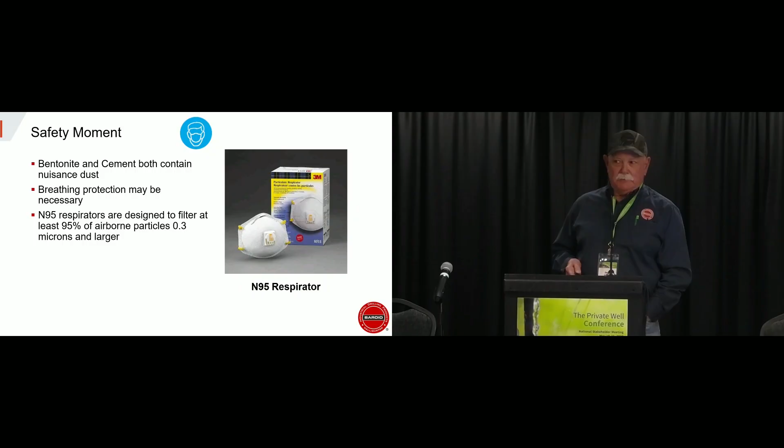With our company, we always start with a safety moment. This has to do with mixing grouts because we create some dust, so it's a good idea to stand upwind from the mixing procedure. There are those N95 respirators we all had to wear for a couple of years, which didn't filter out COVID at all. They'll take it down to 0.3 microns, and a micron is a millionth of a meter, so it's pretty fine.

So why do we seal wells? I got to looking at the presentation by Tom Christofferson, they did a grout study at the University of Nebraska a number of years ago. First of all, it's legal, we comply with local and state regulations and abandonment requirements. Every state's a little bit different, someone mentioned Idaho is different than Montana. For instance, in Idaho, when you're grouting, it's required a 30% solids grout. In most other states, like Oregon and Washington, it's a 20% solids grout. So you've got to know the local regulations.

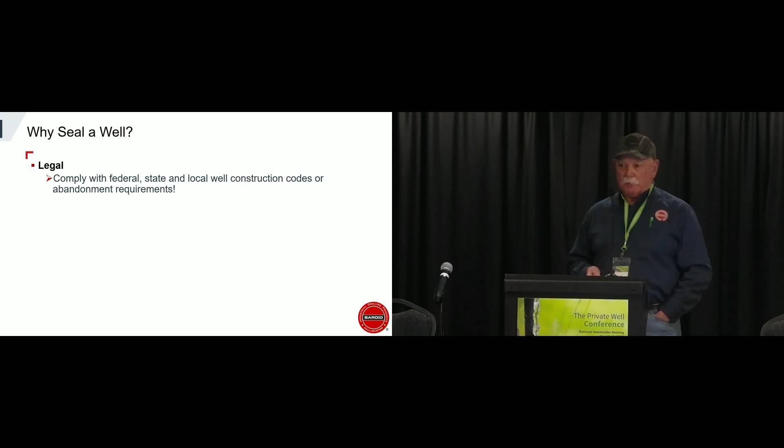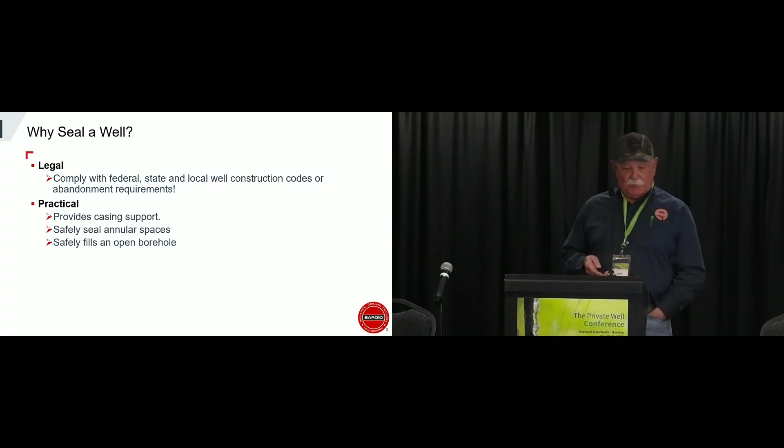On a practical side, it provides casing support, helps to safely seal the annular spaces. We don't want commingling of aquifers, so practically we safely fill an open borehole. We'll get to the methodologies in a bit. For protecting groundwater quality, in the Nebraska study, nitrates were above 10 milligrams per liter, which is the cutoff. They found levels much higher because some wells sealed back in the 50s, instead of using a grout seal like bentonite or cement, just filled the backside with gravel, which provided an avenue for contamination from surface waters or farming activities and nitrates. So we definitely want to keep the aquifers from commingling.

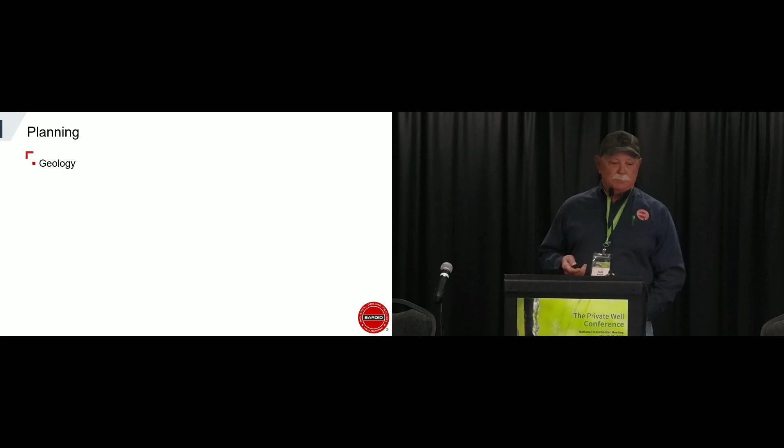What we like to talk about is, we start a good seal with the first turn of the bit, so a little bit of planning, which we'll go over as we go along. Geology is all different, right? We could be drilling in overburden, alluvium, or problematic formations like limestones, or in a lot of western states, volcanics. The vadose zone is a seasonal variation of the water table, which varies depending on precipitation, droughts, and all that kind of stuff.

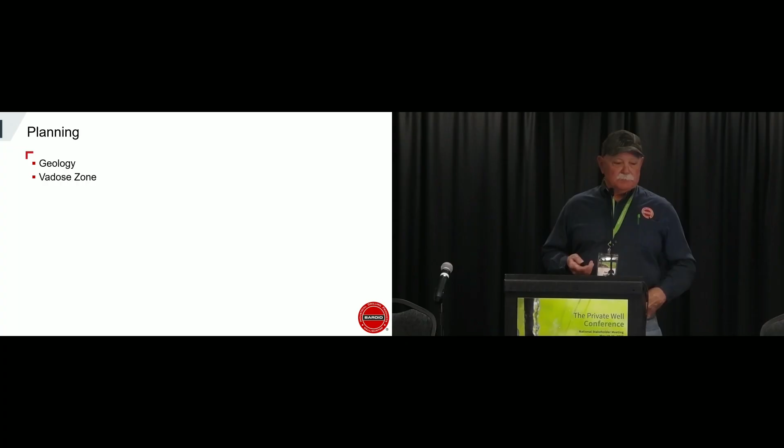Are you going there? Okay. Oh, my gosh. Sorry. Okay, let's go back to where we were.

Okay, with geology, grout choice is influenced by geology. Like I said, we could have limestones, like karst topography, which are dissolution cavities in limestone, so that could affect our grout decisions. One size doesn't fit all. The vadose zone, this unsaturated zone between the piezometric level and the water table, or the ground surface and the water table, is regionally influenced.

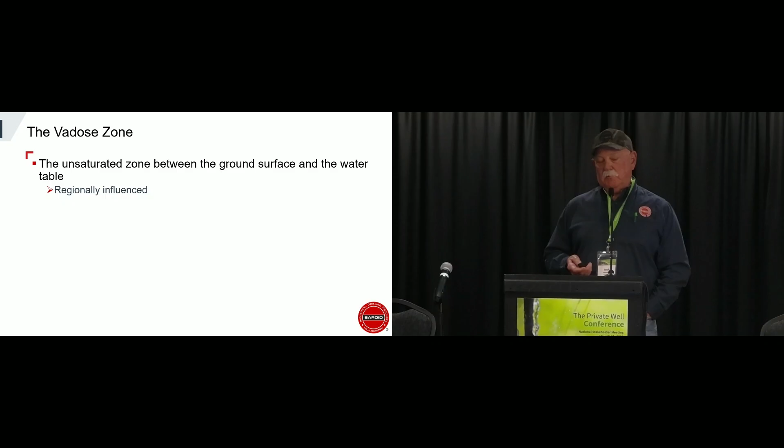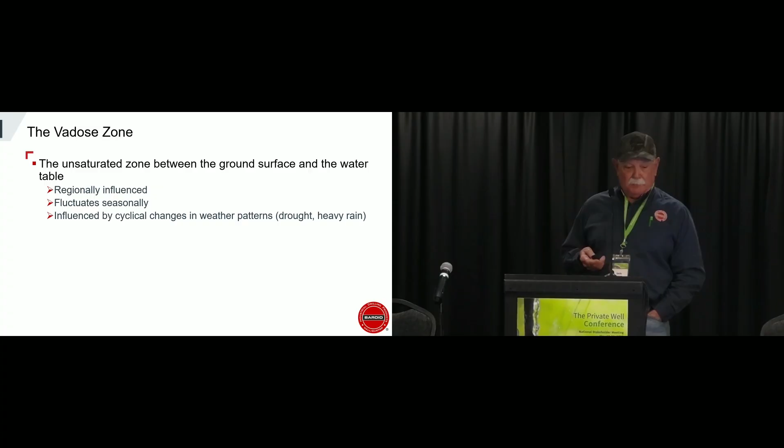Many of you know that we didn't have a lot of snow out west here this year, so we're going to be looking at probably extended vadose zones and drought conditions. It usually fluctuates seasonally, and like I said, this year we're having a drought. Sometimes we'll have so much snowfall we don't know what to do with it.

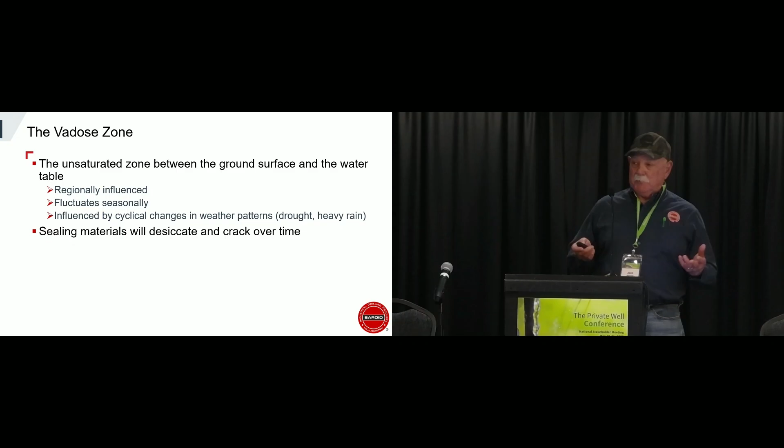Sealing materials can desiccate and crack over time. And I think that's what in the grout study they found, that when pumpable grouts were placed in the vadose zone, well, they just disappeared, so they were able to mitigate that.

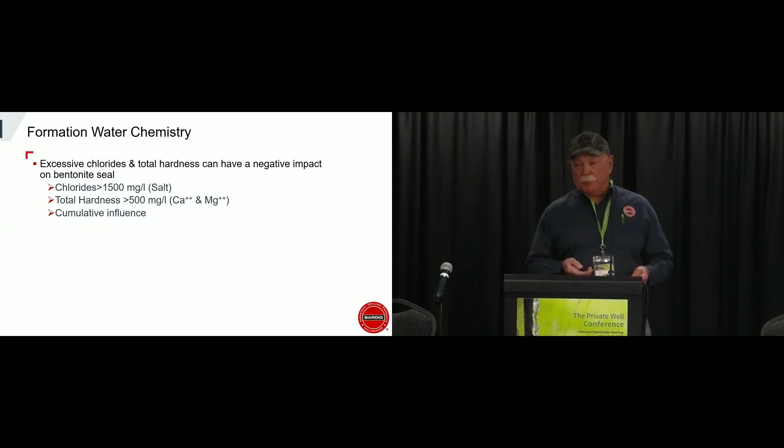Formation water chemistry: excessive chlorides and total hardness can have a negative impact on a bentonite seal. Chlorides in excess of 1,500 ppm, which is basically salt, and total hardness of 500 ppm or milligrams per liter with combined calcium and magnesium. Having both of these is a cumulative effect.

I was working on a job down in Dixie Valley, Nevada, and it definitely wouldn't be good for bentonite. The chlorides were about 25,000 parts per million, and the total hardness was over 2,000. But in that case, we used cement.

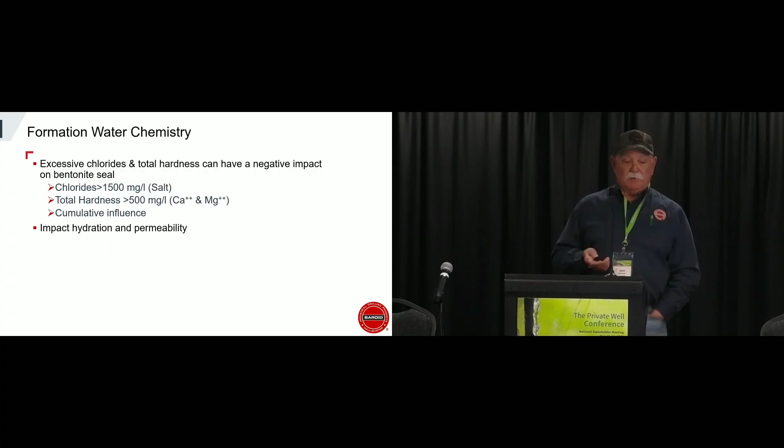If your bentonite's not able to hydrate, it's contaminated. That will have an impact on hydration of the product and also the permeability, which won't give a good seal. So for well construction, we have cased well, we have screens, we have slots, louvered, and also open hole construction.

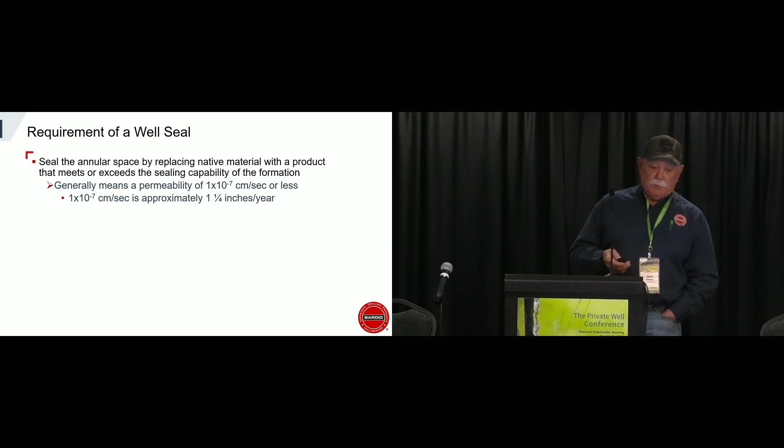So basically the requirement of the seal is to seal the annular space between the casing and the borehole by replacing the native material with a product that meets or exceeds the sealing capacity of the formation. This generally means a permeability of 1.0 times 10 to the minus 7 centimeters per second, or approximately 1.25 inches per year. Pretty low.

So different types of sealing materials that we use: calcium bentonite. There's a lot of bentonite around the world. It has a dominant calcium exchangeable ion. It's not a very good sealant. Normally these things are used for skincare products and different things like that.

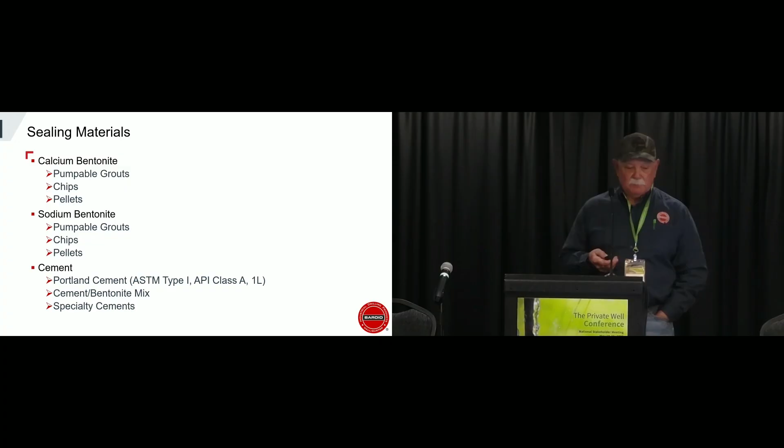Sodium bentonite, definitely the best bentonite for sealing, in the form of pumpable grouts, chips, and pellets. And then, of course, there's our old friend cement: Portland cement, kind of a blend of cement and bentonite, which is pretty common, and also specialty cements.

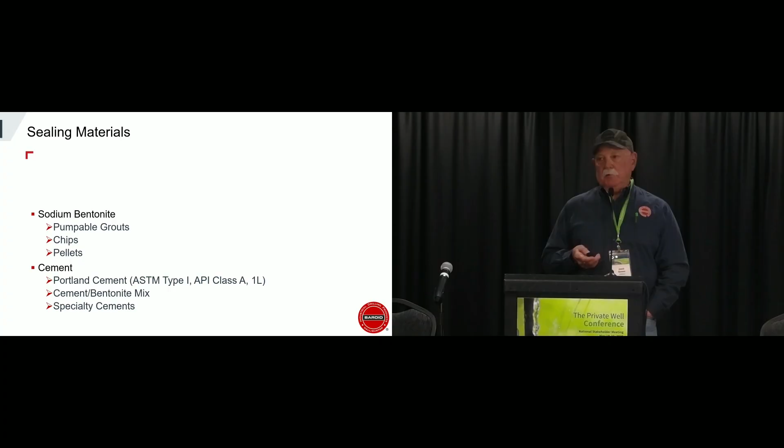With calcium bentonite, we don't normally use it for sealing, so we're going to take that out of the equation. A lot of bentonite clays from around the world don't have the sealing capacity that sodium bentonite does. So what do they do? They enhance it, either with polymers or with soda ash to try to make it a better bentonite. But it's best with bentonite that's generally mined in Wyoming and Montana.

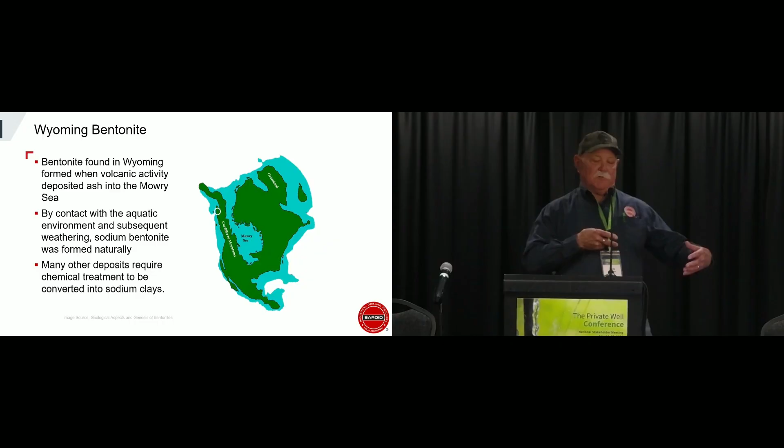I'll tell you why we got lucky with the bentonite out here in Montana and Wyoming. It was basically a pulse. Anybody know about the Yellowstone hotspot? It's basically a mantle plume, and the continental United States is sliding to the southwest. We started with volcanism basically from maybe Tillamook, Oregon, Smith Rock, McDermitt, Nevada, all the way up to Burley, Idaho.

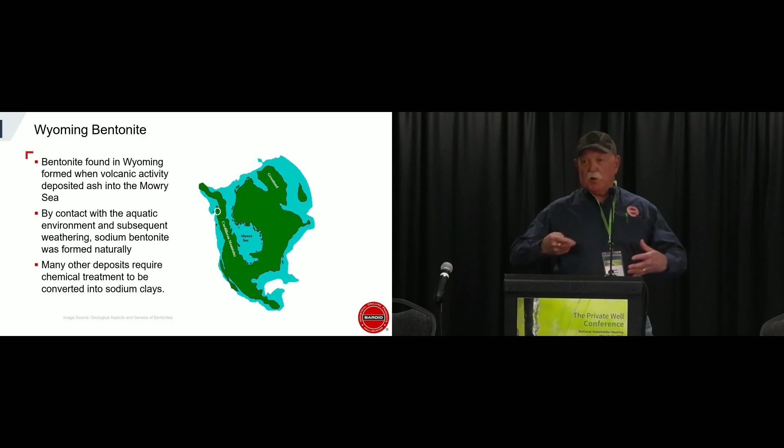So these pulses of volcanic ash were put into an inland sea, probably Gondwana land, or when the continents were all kind of stuck together. But we got the pulse, and there's no other bentonite in the world like it. As this volcanic ash fell into this aquatic environment, subsequent weathering and metamorphing of the clays turned them into a natural high sodium bentonite.

Like I said, some of the other clays found around the world have to be beneficiated with some sort of material, either with a polymer or something like soda ash.

So why use bentonite for a seal? It has the ability to hydrate and expand. I used to be able to take like a 16-ounce cup of Hole Plug, what we would call bentonite chips, and add the same amount of water and seal that up in a 1 quart Ziploc freezer bag. As the bentonite hydrated, it expanded, and it would actually break the seal on that 1 quart bag. That's kind of what we're looking for: it's expansion pressure, and it's also confining pressure.

So we want a low permeability material, less than 1.0 times 10 to the minus 7 centimeters per second, and increased slurry volume over possibly using cement, for instance.

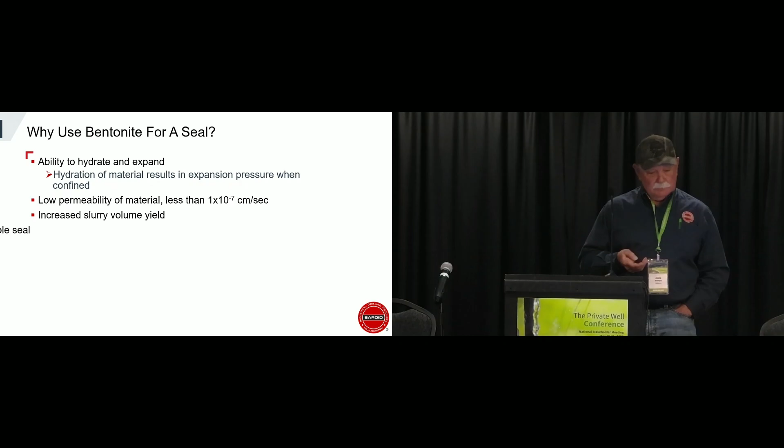It produces a flexible seal. Anybody who's ever seen bentonite, it's just like hard modeling clay. And there's no heat of hydration.

I'll explain that. Basically, when you're using cement, as it cures, it's an exothermic reaction, so it gives off heat. That heat can sometimes be excessive enough to deform plastic pipe, and also with steel pipe, because as the exothermic reaction goes, it gives off heat. So with steel pipe, it actually expands the steel a little bit, and as the cement cures, the steel contracts. So there you have a micro annulus, and your seal isn't what you need it to be.

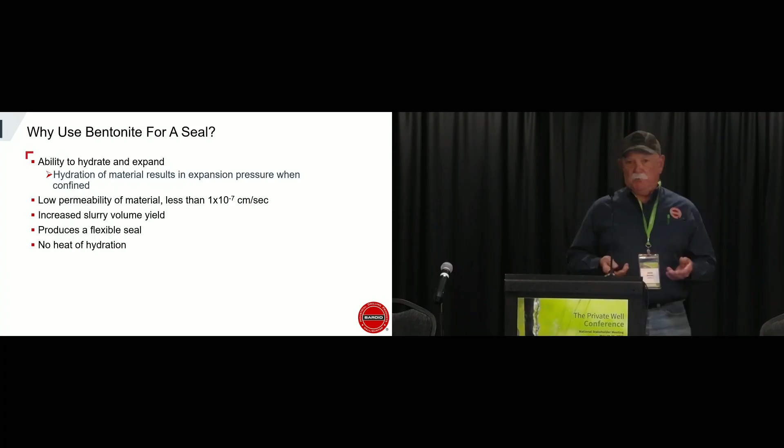So high quality bentonite produces higher quality seals. Sodium bentonite is superior to calcium bentonite.

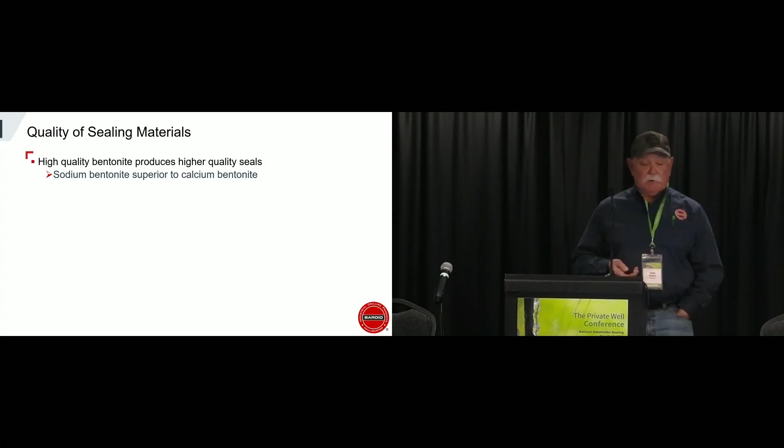So the definition of high quality bentonite: it's a high percentage of sodium montmorillonite. Montmorillonite is basically a smectitic clay that actually expands, so it results in higher liquid limits, meaning it can take on more water to expand the structure, providing higher expansion pressure. That's determined by analysis of untreated bentonite, XRD or XRF. So it has a high shear strength and a high degree of confidence in the seal.

This is just a little diagram of the different types of sealing materials. We start off with bentonite, then we'll go to pumpable grouts. Pumpable grouts are convenient because you can actually place them down the annular space of the borehole without having to worry about bridging and leaving gaps in the seal itself.

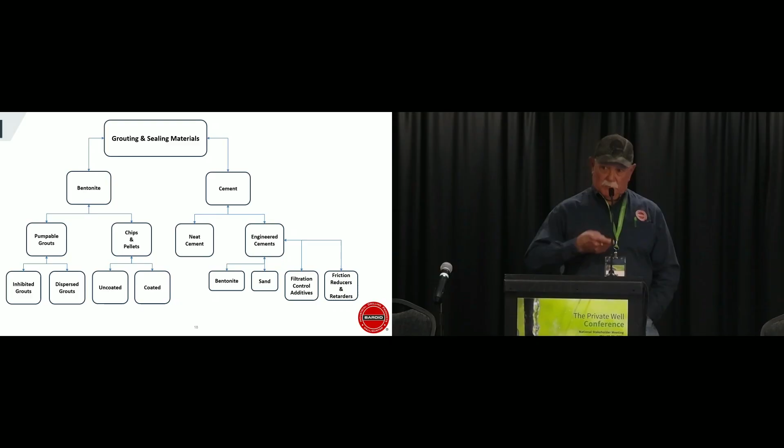And of course, there's chips and pellets. The bentonite chips are probably the best seal available out there, but there are issues with actually getting 3/8 inch material down, let's say a couple hundred feet, without bridging off. Some states require that you tremie it down from the top of the gravel pack where your aquifer or producing zone is, all the way to the surface.

Other states require that you sieve it out, because all bentonite is just clay and it gets moved around in the bag, so you're going to have a dust issue. Some states require you to remove that dust by running it across an expanded metal screen or something like that, because what bentonite clay dust will do is viscosify the water that's in the well, which impedes the downward travel of the bentonite particles to depth, so you don't bridge off.

So we have inhibited grouts, dispersed grouts, and pellets. Maybe some of you have seen pellets. There's a company called PDSCO, I believe, that takes 30 mesh material and squeezes it together at 3,500 PSI, and the inherent moisture content in the clay creates a nice pretty pellet. Many engineering firms require them because they're kind of pretty and they seem to pack really well. But if you consider it's a 30 mesh material versus a 3/8 inch solid piece of clay, the seal probably isn't going to be as good as a chip bentonite.

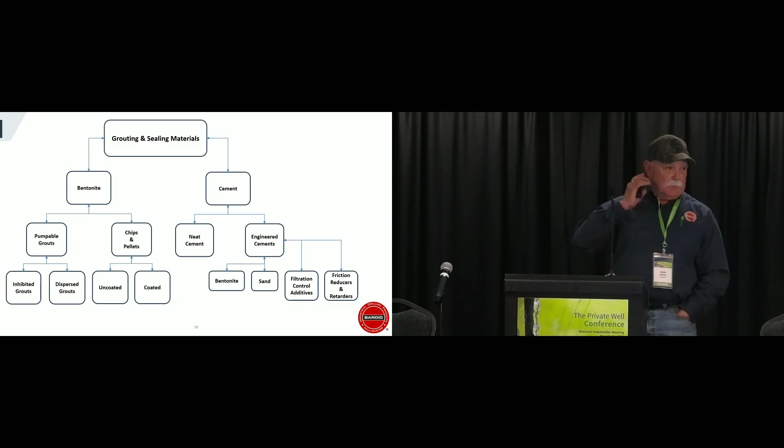And then we'll look at cement. There are different types of cement: neat Portland cement, and engineered cements. With engineered cements, because of different concerns like heat of hydration and other factors, a lot of engineering and hydrology firms will have you add bentonite to the cement.

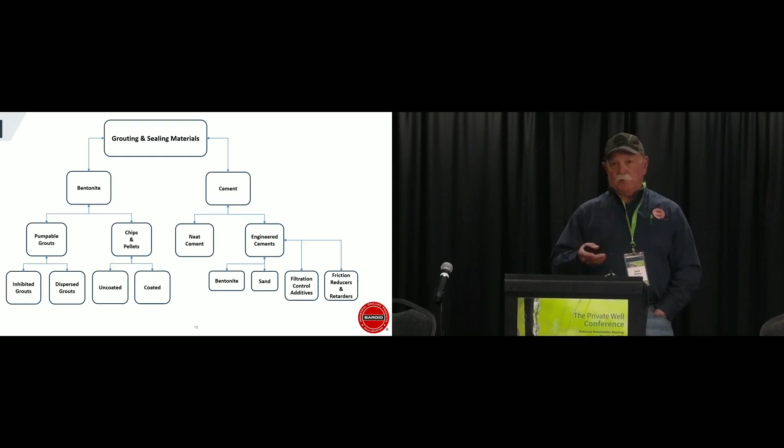Bentonite does benefit the cement. It actually has a higher water requirement, so in other words it lightens the cement a little bit and it also pumps a little better. But because it has an additional water requirement, it has a slower set time, and the heat of hydration is not as high. And then, of course, when you mix cement the way Halliburton likes you to mix it, a concentration of 5.2 gallons of water per 94-pound sack of cement, which is a cubic foot, the cement can get a little thick.

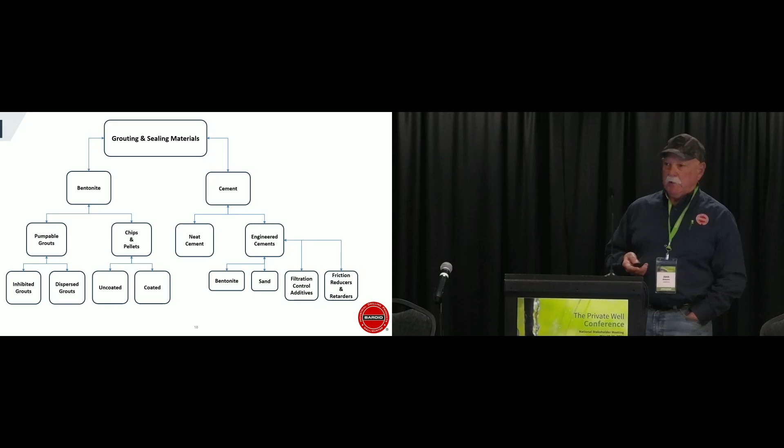Cement can get a little thick, and if you don't have the proper equipment on the rig, it's going to take too much time to pump the cement.

It could go off down the hole, and it has other problems. But I mean, we can address all those.

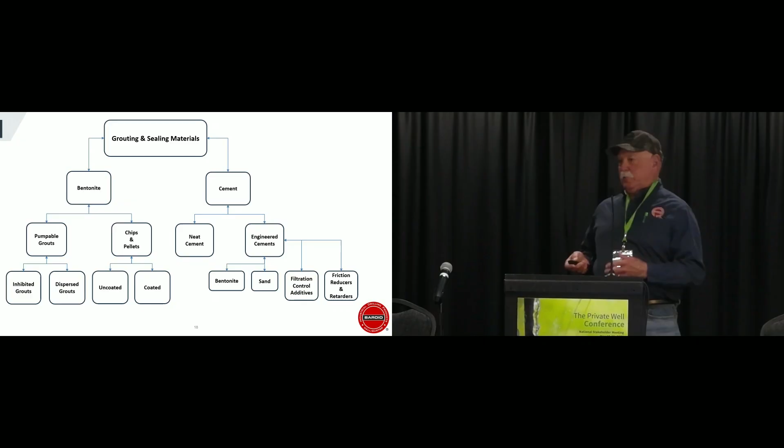Chip bentonite, utilized in well completion abandonment, gives the best possible seal, highest percentage of solids, and the maximum structural integrity.

Here again, you have to be able to get that bentonite down between your casing and the borehole, so it takes a while, and it takes a little bit of methodology to actually get it right.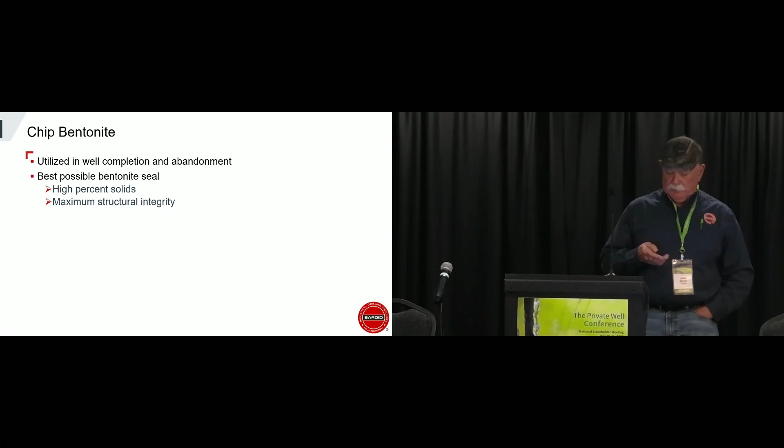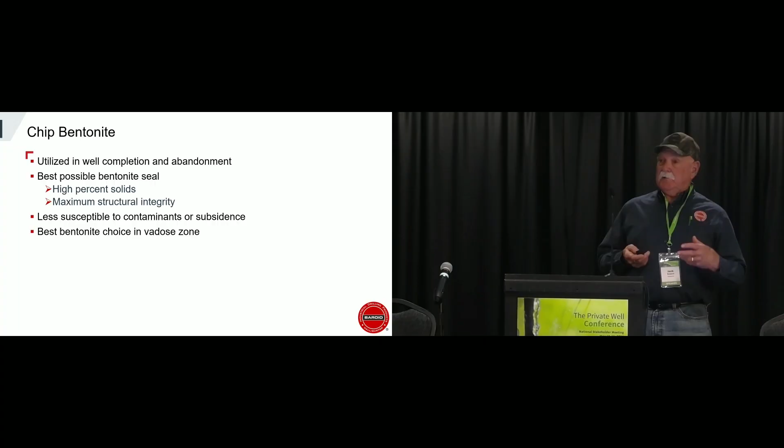It's less susceptible to contaminants and subsidence, and it's the best bentonite choice in the vadose zone, as determined by the Nebraska grout study.

It was unconditionally the best. It requires adequate annular space and proper installation methods.

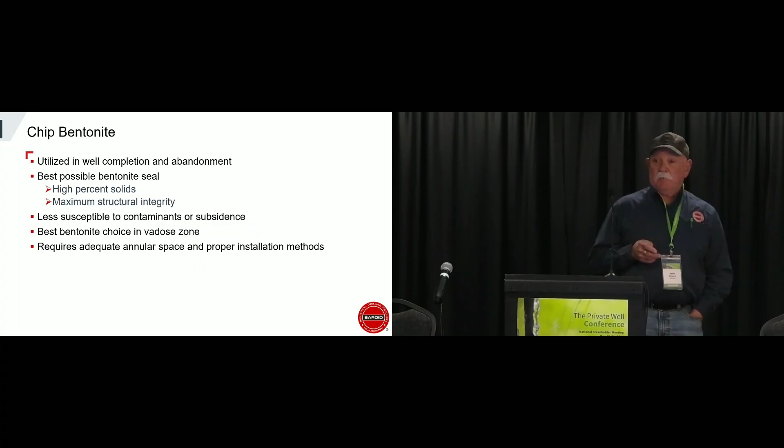So in general, we like to say 2 to 3 minutes a sack. But I've done that - I've been in core holes in Nevada, and we put the timer on, and we try to mix 3 minutes per sack, and you had to put like 50 sacks down the hole. Well, it wasn't pretty. So, well, we cheated a little bit.

And it's recommended above the filter pack, where your shale trap is, to put a certain thickness of bentonite on top of that before you start. You may possibly be using either cement or pumpable grouts.

And there again, 1.5 times 10 to the minus 9 permeability.

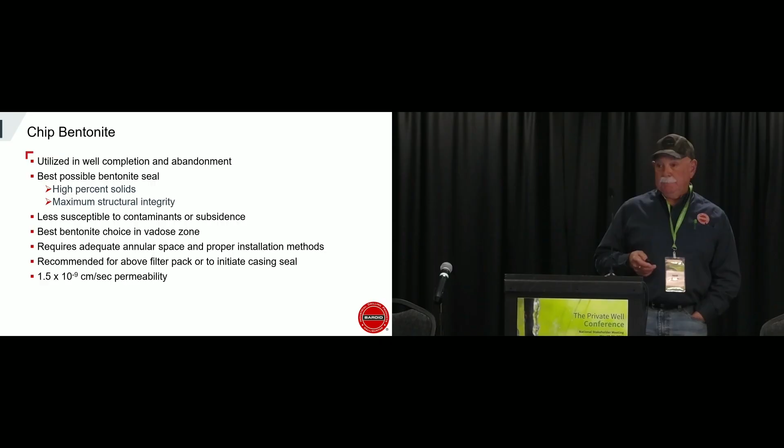So here's a couple of pictures of a device where you could actually put the chip bentonite across that expanded metal screen, and if there's any dust in the sack, that's removed before it starts traveling down. Like I said, bentonite is a viscosifier, so if you viscosify the water that's in your annular space, it

will slow the migration of the bentonite down to the bottom of the hole, which could cause bridging, which could cause not a very good seal.

And I've seen quite a few of these different types of devices, anything made out of sewer pipe or whatever, but just to get the dust out, and then if you can kind of figure out 2 to 3 minutes per sack to put that down the hole.

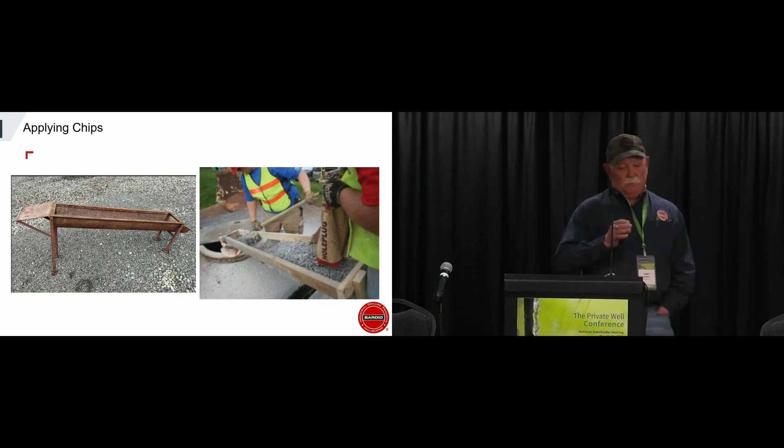And there's another thing - you should know what the approximate amount of volume you have in the hole.

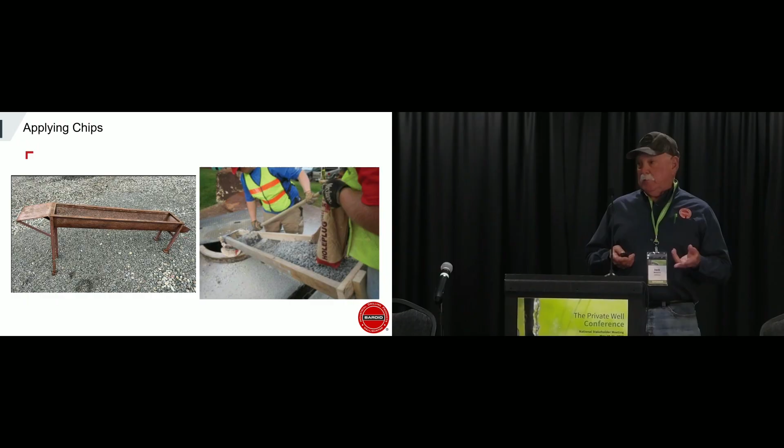And so we know that 1 sack of granular bentonite, the 3/8 size, is roughly 0.7 cubic feet. So if you know your approximate amount of material that you need and you use half of it, I'd say you've got a problem somewhere. So it's likely a bridge.

Bentonite pellets, like I said, are 30 mesh material squeezed together, probably at 3,500 PSI, and they come in different sizes - I think quarter, 3/8, and maybe half-inch.

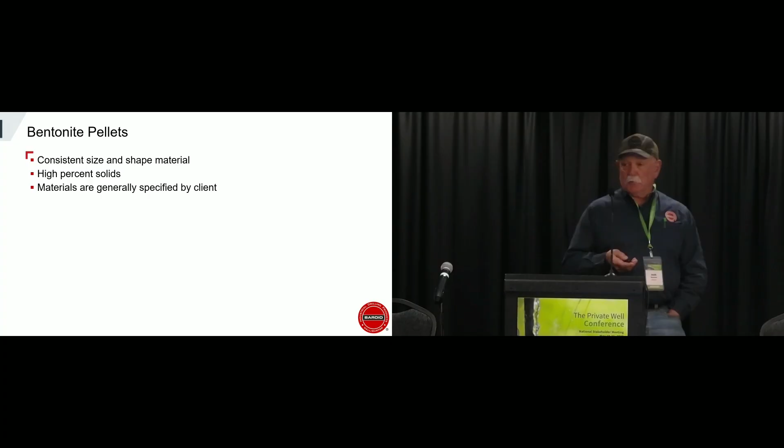A high percentage of solids, and they're usually specified by the client. Now they're kind of expensive, and so if the client's willing to pay for them, I guess that's what's important. But they don't have the structural integrity that chips have, because when they hydrate, now you have 30 mesh material rather than a massive chunk of clay.

So there's two different kinds. There's untreated compressed bentonite, which will probably go off a little faster, and they're probably a lot less money than the coated pellets, and they're quite a bit more than chips. And can be problematic in emplacement, because especially with uncoated pellets, once the water starts hydrating

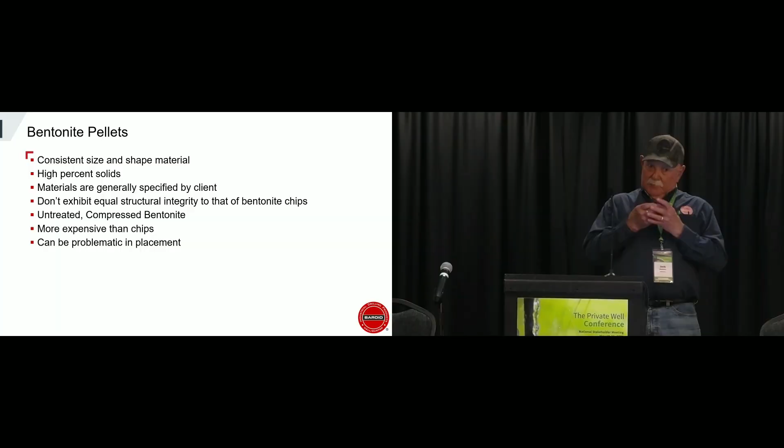them, the likelihood of them bridging off the annular space is there. I don't know what time period that would be, but

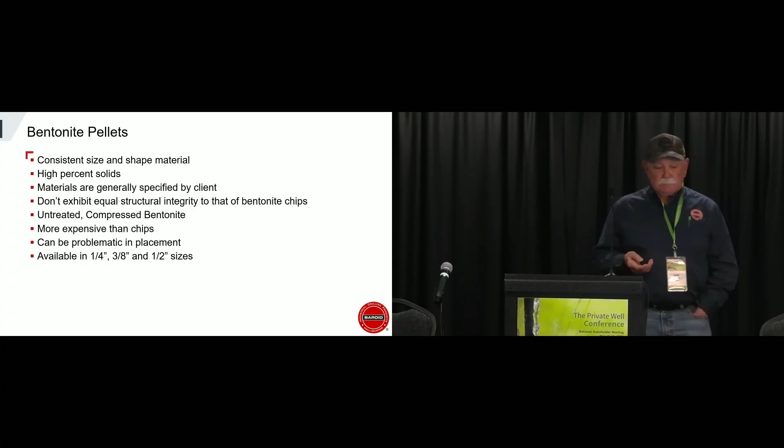so like I mentioned, quarter, 3/8, and half-inch size pellets, and a lot of hydrologists and engineers that engineer a well will specify that you use these pellets.

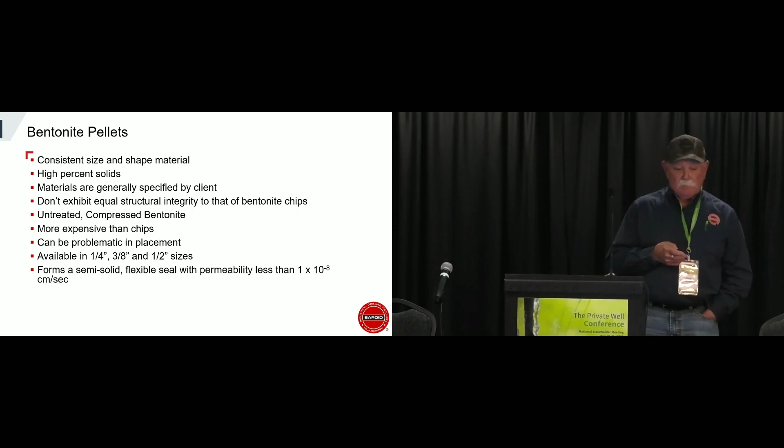And so it forms a semi-solid flexible seal, and the permeability is 1.0 times 10 to the minus 8 centimeters per second.

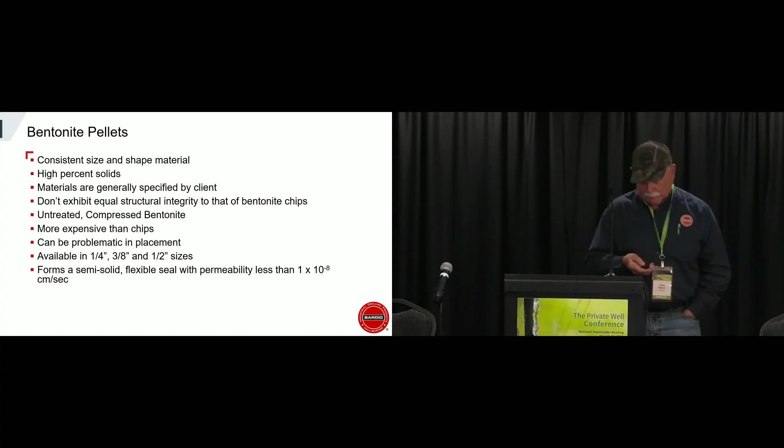And like I said, coated and non-coated. Sorry, I'm getting ahead of myself. So inhibited grouts utilize inhibitive polymers to achieve working time to mix and place grout. Like I said, in the vadose zone, not good - so we have to keep that in mind when we're using pumpable grouts.

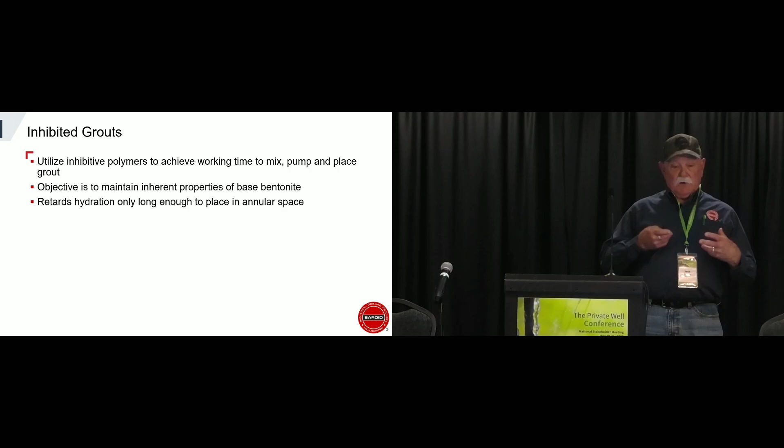So the objective is to maintain inherent properties of the base bentonite. We want to retard the hydration long enough to get them placed in the annular space. And when you pump grouts, you need to have the proper equipment.

I've seen a lot of things, but you have to have a grouter. Grouters are expensive, but if you're in the business of placing grouts, it's a good investment to buy one, because you run into problems by not having a really good seal.

They're less susceptible to subsidence and loss to formation because they are a size chip, probably anywhere from 30 mesh to 1/8 inch. Definitely not the best for the vadose zone. Like I said, we have to have proper equipment, grouters, and mixers. Usually they're one and the same.

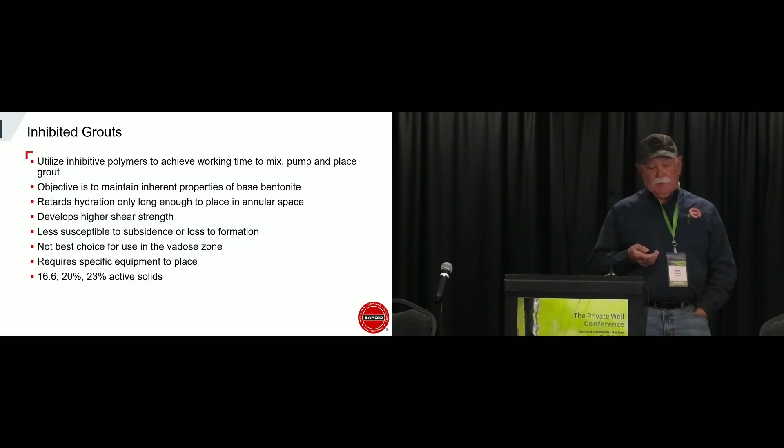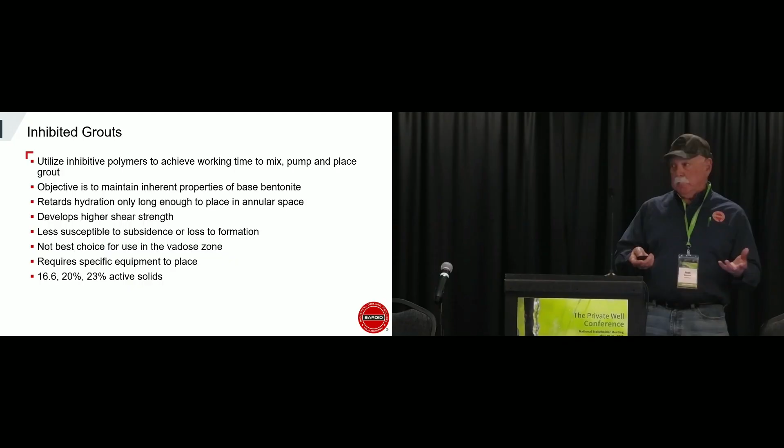So here we have probably 17, 20, 23% active solids. We talked about active solids, that's active bentonite solids. We could look at different types of solids. If you put a whole bunch of sand in some sort of fluid, that's a solid, right? So we want bentonite solids. And permeability here is 1.0 times 10 to the minus 8.

Now we get into dispersed grouts. I'm looking here, sorry. Pardon me for a minute. Timer went to sleep on me, so.

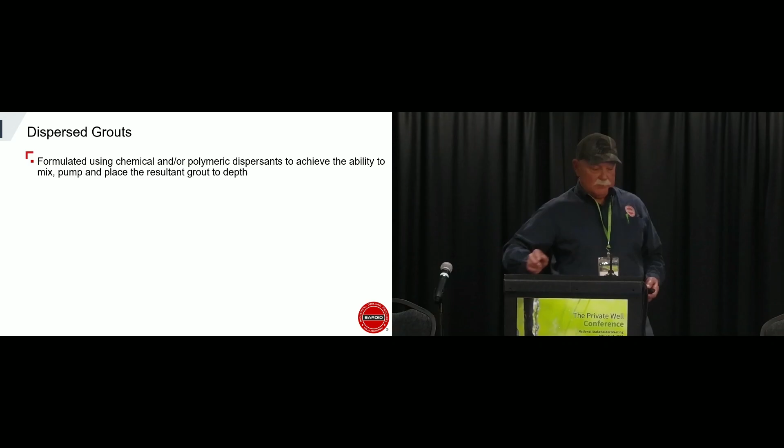Dispersed grouts are formulated using chemical or polymeric dispersants to achieve the ability to mix, pump, and place the grout. The category of pumpable grouts has gained popularity due to demand in monitoring wells. Monitoring wells are definitely smaller, with a smaller annular space, so liquid pumpable grouts are probably preferred.

Some water samples taken from monitor wells test for presence of hydrocarbons. Carrier oils that we normally use to inhibit the grout start out with a carrier fluid that started life out as an acrylic acid, which is a hydrocarbon. So if you're testing for these in monitor wells, probably not that type of grout that you want to use.

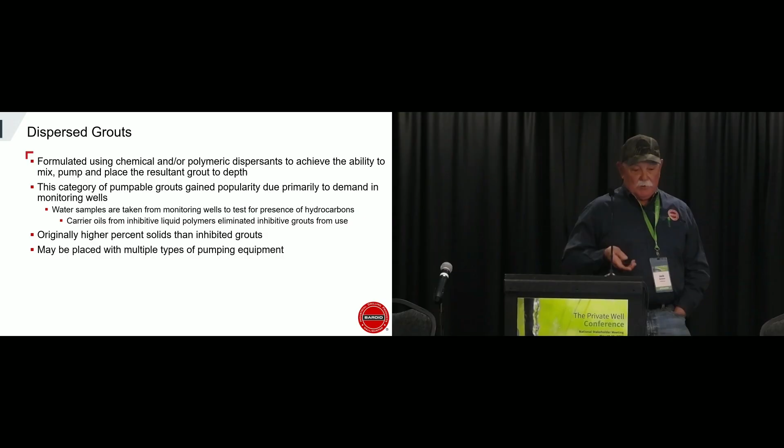Originally, a higher percentage of solids than inhibited grouts. We can place it with multiple types of equipment. They have low shear strength.

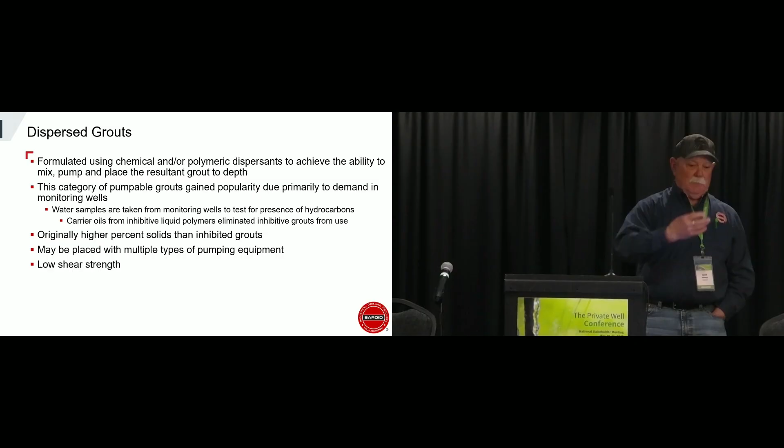Type of equipment I'm talking about is like Wilden pumps, an air pump, a Moyno pump, a positive displacement pump. They have low shear strength, and they're more susceptible to subsidence and loss to the formation. Definitely not to be used in the vadose zone.

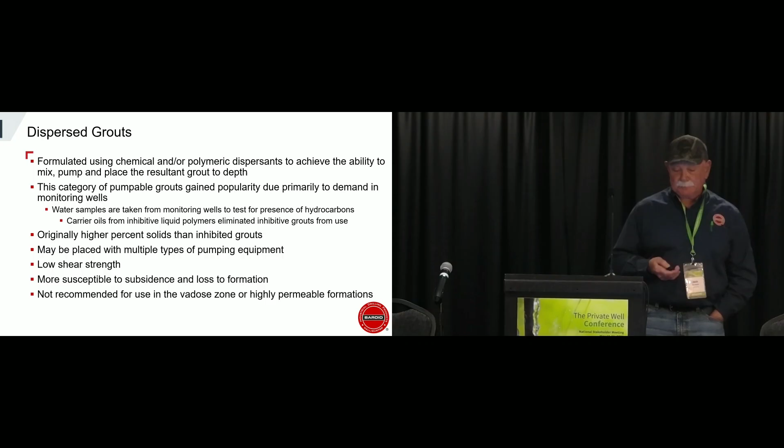So most 20 to 30% pumpable grouts are referred to as dispersible grouts. In place, like I said, multiple types of pumping equipment.

And totally inorganic additives. Now this is a little sidebar here. A lot of states, everybody wants biodegradable, right, in your products, whether it's drilling products or drilling additives. Biodegradable is not good in the water well industry. Just kind of going off the ranch here.

If you use some sort of organic fiber, whether it's cedar fiber or paper, or multiple types of lost circulation material, and there's a lot of natural polymers like guar gums and starches and different things, what that does is provide a food source for bacteria in the water in the aquifer.

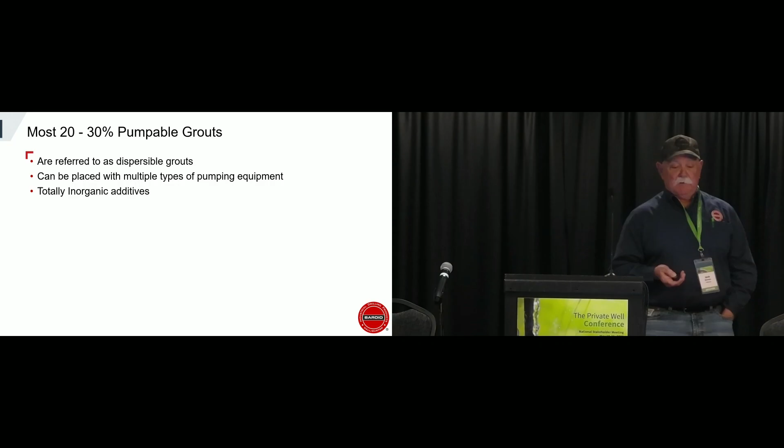But not all bacteria is bad. Some bacteria is pretty good. But they all like it, and they get happy, and they multiply, and all of a sudden now you'll have a bacterial plume in your aquifer. So that's why everything's inorganic, because of the bacterial nutrient that we provide to the bacteria in the groundwater.

Low shear strength and susceptible to subsidence and loss to the formation because they are liquid, and if you have some sort of a fracture, or a fault, or whatever, you'll probably lose that. I don't know why they disappeared in Nebraska, but they did.

So, what's that? One more minute. Oh my gosh, I got a lot of material. So anyway, don't use these in the vadose zone.

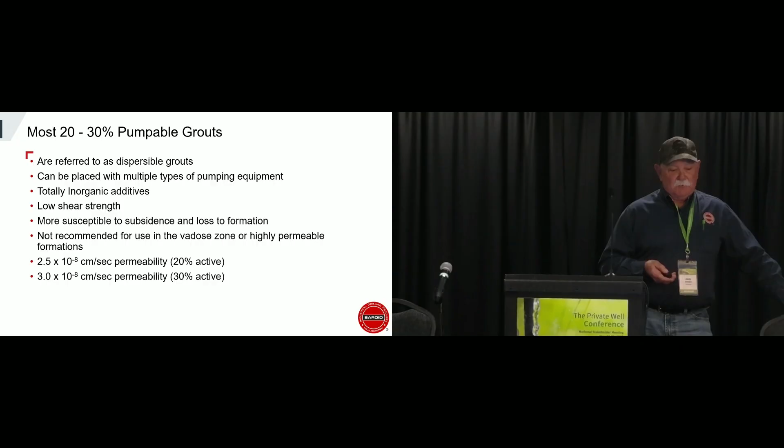We'll get on to cement here in a minute. 20% and the 30% respectively, 2.5 times 10 to the minus 8, and 3.0. Okay.

Pumpable grouts, proper applications: stable borehole environments, saturated zones, no vadose zone. Improper applications: unstable borehole environments. You don't want to have bridging going on. Not in the vadose. Highly unconsolidated fractured formations, bridging again. Artesian environments, you don't have enough hydrostatic head to keep that contained.

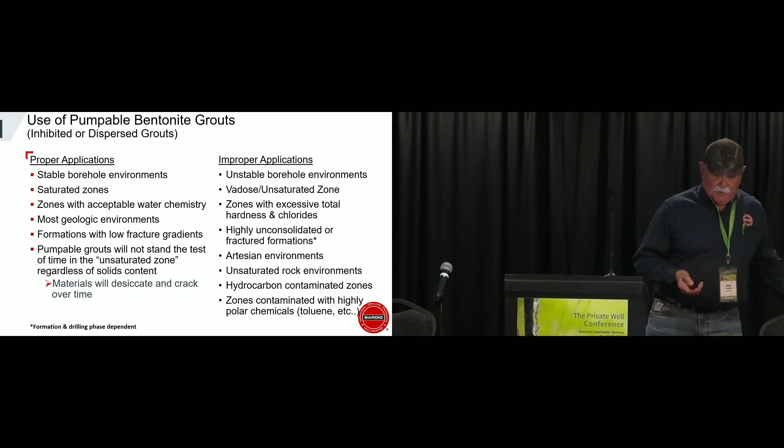Hydrocarbon contaminated zones, zones with other contaminants, and different types of bentonite: chips, pellets, coated, dispersed.

I don't want to rush through cement, but I want to talk about it. It has high compressive strength and resistance to contaminants.

I live on the West Coast, in Washington, but anywhere you might have an evaporative basin where you're going to have high chlorides or high hardness, cement might be a pretty good alternative to using bentonite grouts. Those two contaminants are contaminants for bentonite.

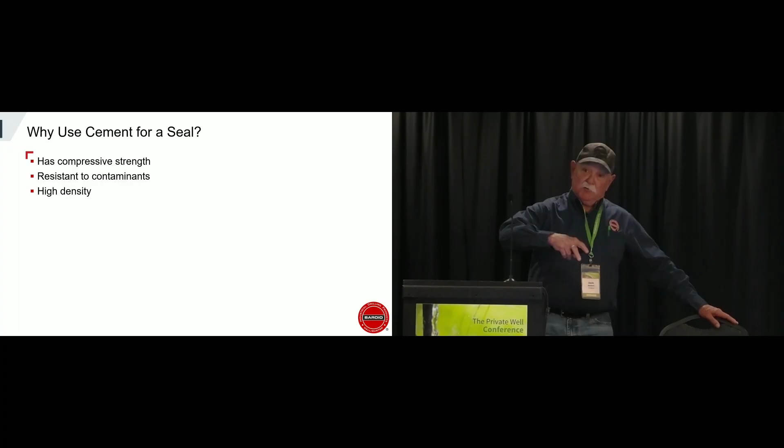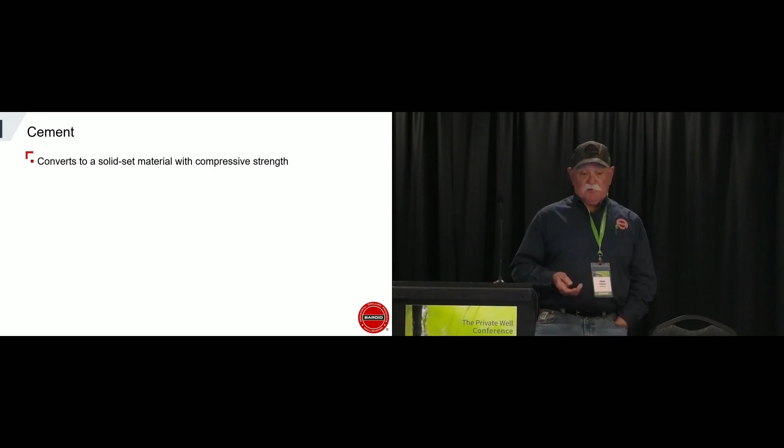They won't allow them to swell. It has a confining pressure, and they're high density, so if you have artesian kind of conditions, a lot of people used to say cement's number one. It becomes a strong material, 12 pounds per gallon up to 16 or 15 and a half.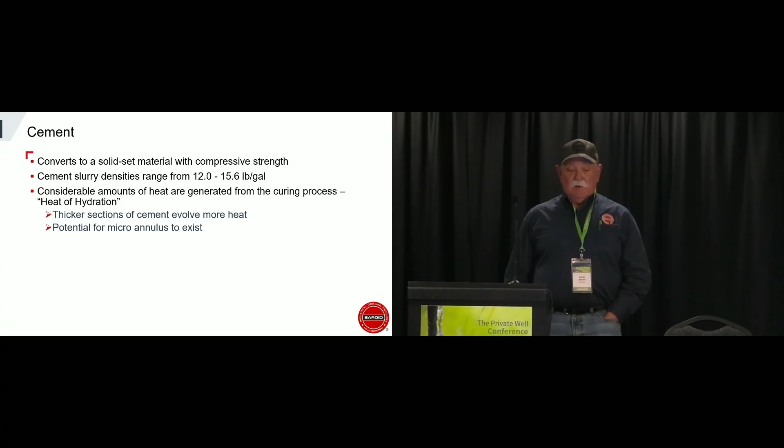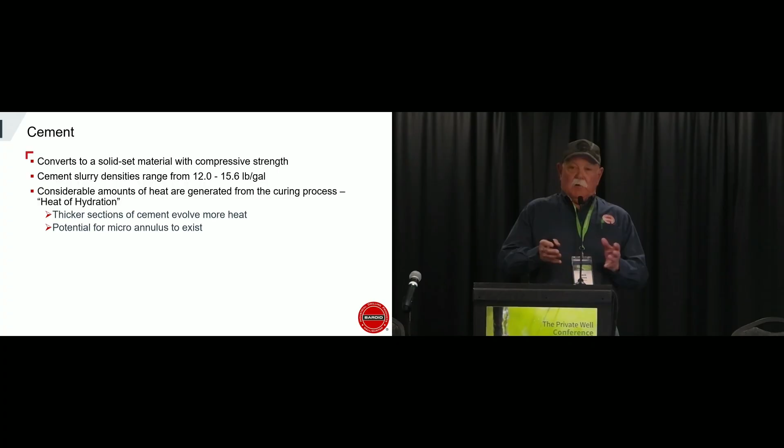The thing about cement, heat of hydration, it can collapse PVC. You create a microannulus in steel pipe to where it expands it. When it cools, it contracts, and now you have a microannulus.

Filtration control, in other words, you have a hydrostatic head on the cement. It tends to push the water out. Cement has a requirement for water, but there's additives to counteract that as well.

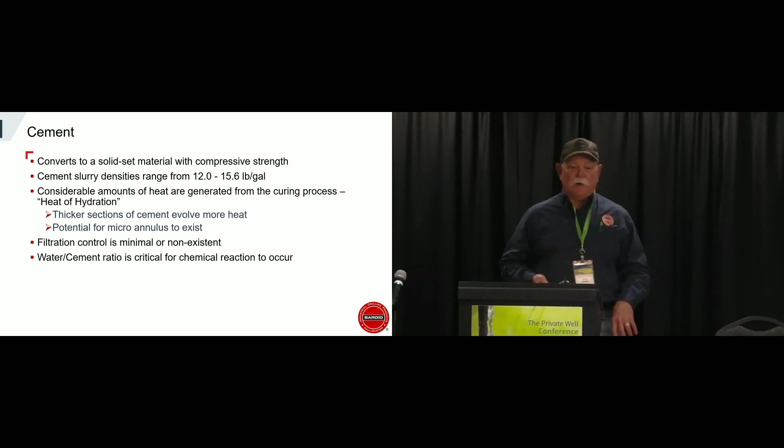Do we have 30 more seconds? Okay, yeah, I think we took a few minutes from you. Okay, in the beginning, so.

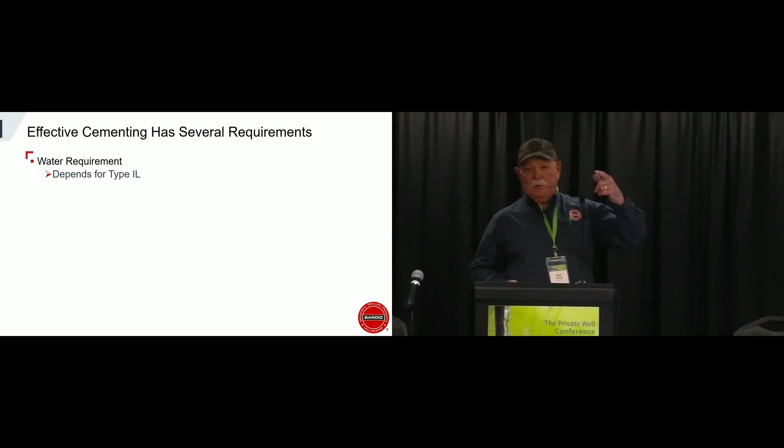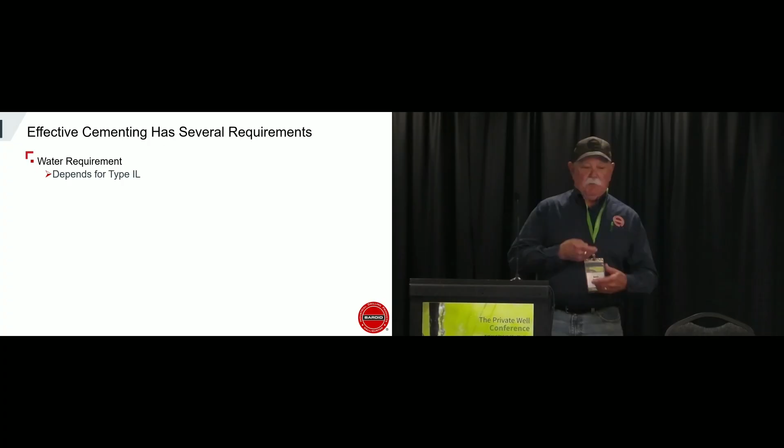Cementing water requirements. Quickly, the cement industry came out with a different type of cement other than Portland. They called it IL. With IL, basically, when you create the clinker, it has to go through a furnace, and so it creates these cement minerals. What they decided to do, because I call it green cement, you don't run it through the furnace as long, so you don't use as much fuel. So they reduce the time exposed in the furnace, and the manufacturer will add either 5 up to 15% calcium carbonate dust.

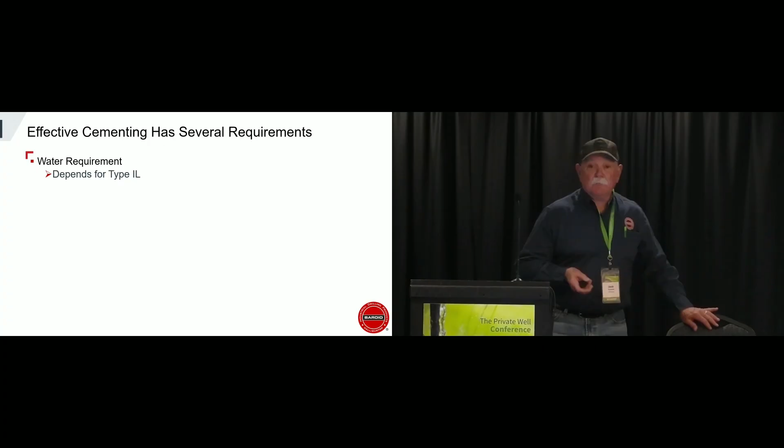No manufacturer has the same mixture. Some of the cements we were seeing, these IL cements, were going off, like when we're cementing downhole, cementing some mining equipment, mining wedges, other types of stuff. It would go off on us. What we wanted was predictability, so we were having a problem with that.

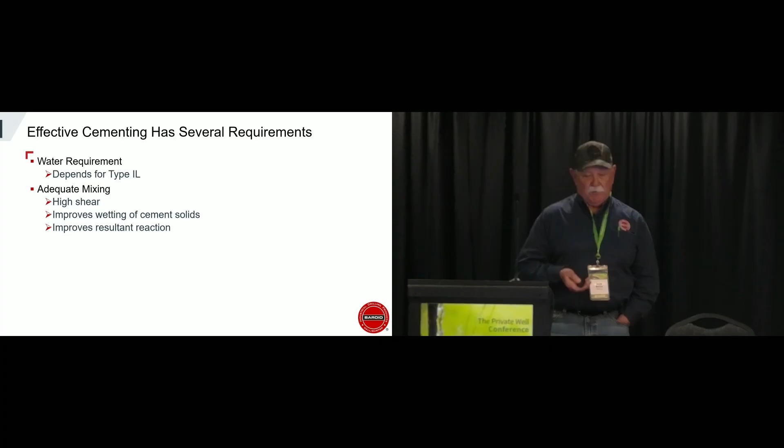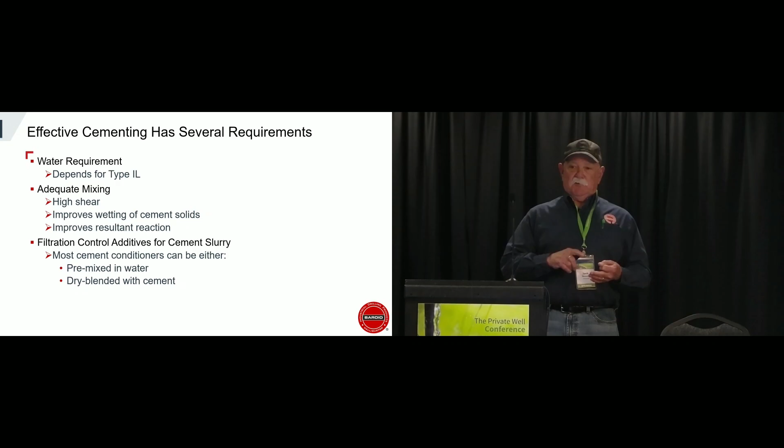So we rectified that with just a little bit more water requirement than we would use with Portland type 1, type 2 cement. Filtration control additives, you can add to the cement, doesn't change any of the characteristics, it improves your flowability, and it also reduces your time, giving you better assurance that the cement has gotten down to where it needs to be.

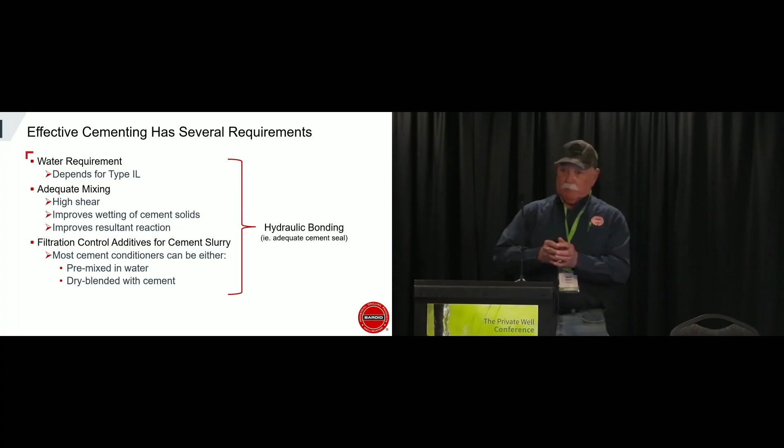And everything with cement, what we want is hydraulic bonding, right? We want it with the casing and with the borehole. You guys remember that big fire they had down in the Gulf of Mexico? That was improper hydraulic bonding.

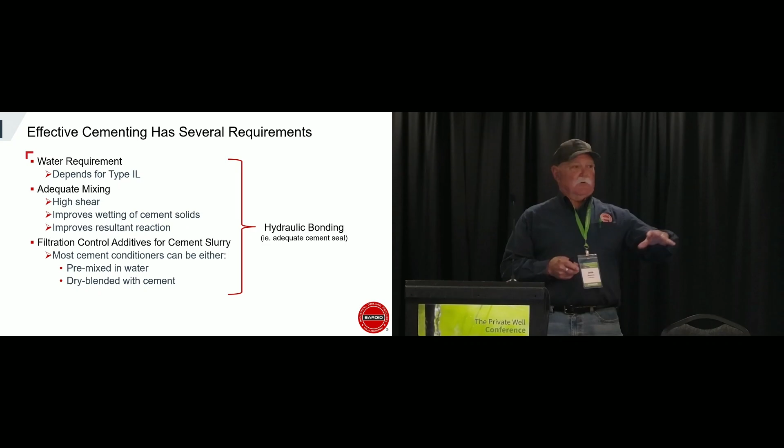So basically, we talked about in the beginning, the drilling type of method. When you're drilling, you create what we call filter cake on the borehole. If that's not removed and you try to cement, then you're not going to get a cement-borehole bond. So it's important that you do the drilling process properly as well.

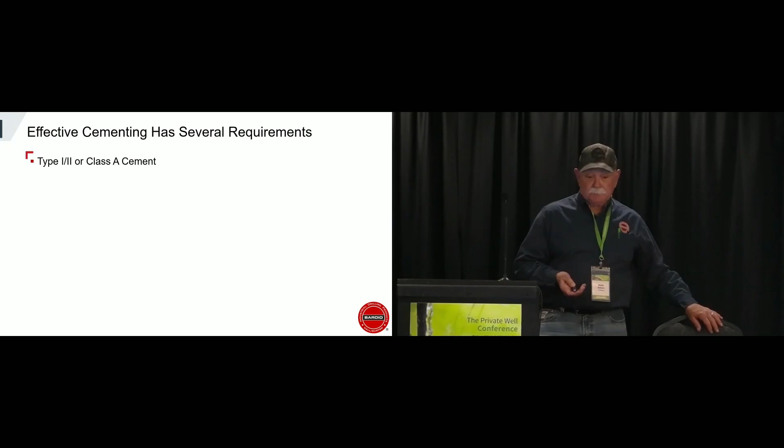So here we go. What we recommend is 6 gallons of water and a 94-pound sack of cement, of course with proper equipment for mixing everything. Always remember the fundamentals of grouting, what we're trying to achieve.

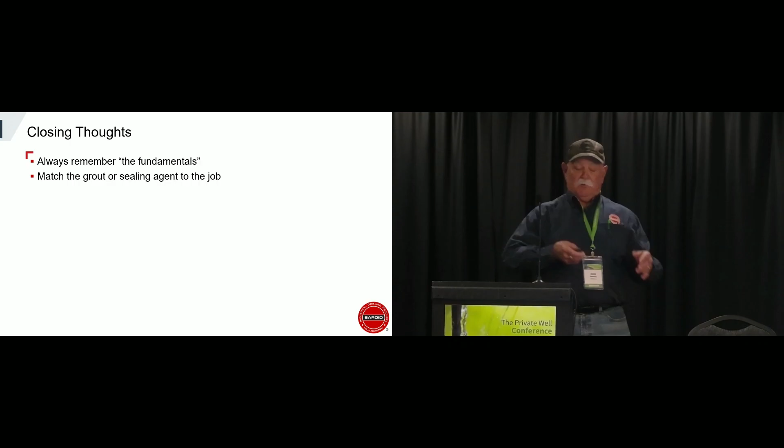We match the grout to the sealing job, whether we have contaminants or whatever we might want to use, cement versus bentonite or a bentonite type of grout. Bentonite seals have limitations, so use the right material for what it's designed for. The most common reason seals fail is improper placement, and I would say bridging.

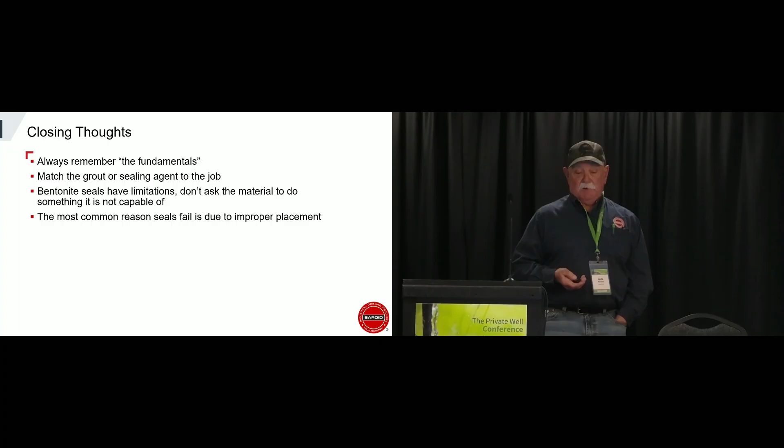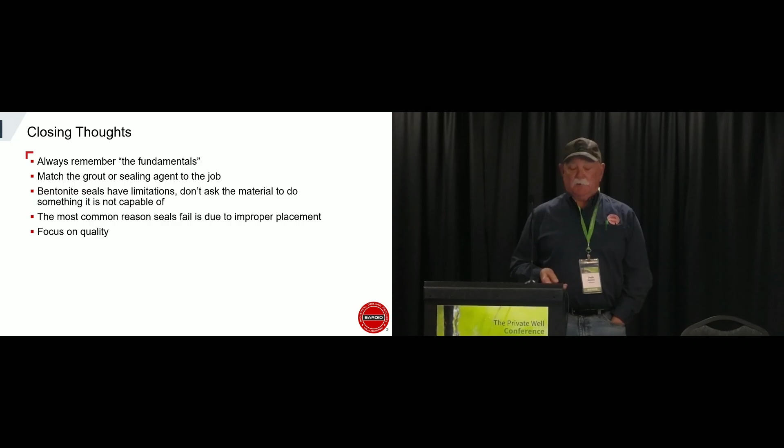I think that's focus on quality. Some bentonites are all created differently. Like I said, we got the best out here in the West. There are other clay deposits around the world, but they're certainly not as good as what we got with the luck of the draw. I don't know why.

And like I said, a successful seal starts before the first turn of the bit. And that's all I got. So are we done? Yeah, okay.